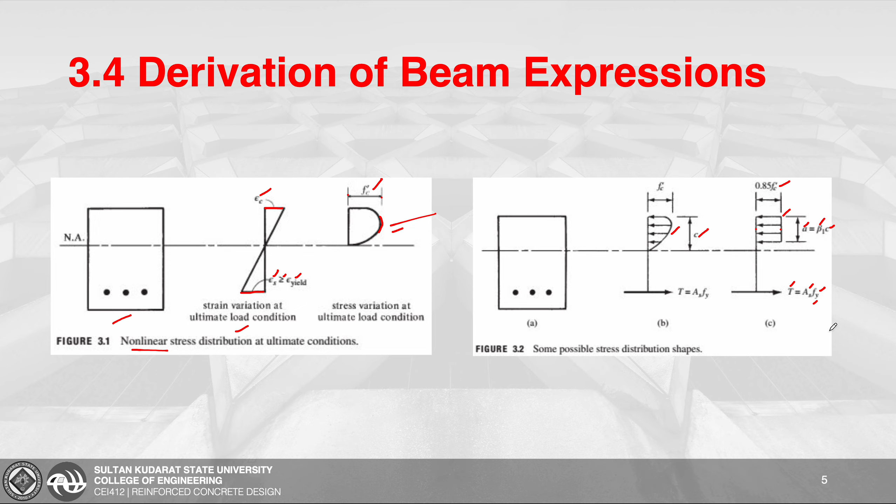And instead of using C, we're going to make use of the depth of the compression block A, which is equivalent to our beta factor times our C. And of course, our tensile force T is equivalent to AS times our Fy. Fy is used here because this is considering that our extreme tension steel yields.

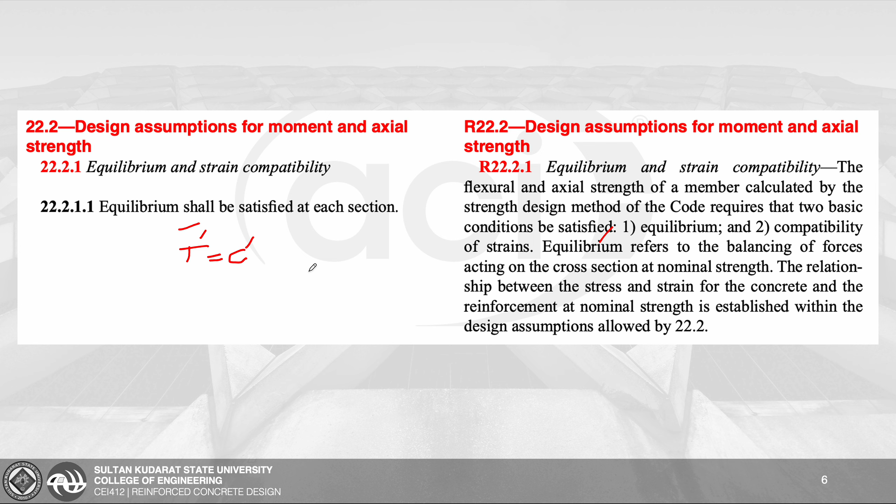These are our design assumptions for moment and axial strength. First, equilibrium shall be satisfied at each section, meaning the balancing of forces acting on the cross-section at nominal strength. That's why we have the relationship that T is equivalent to C, in which T represents the tensile force of our steel reinforcement, which must be equivalent to C, the compressive force from our compression block stress.

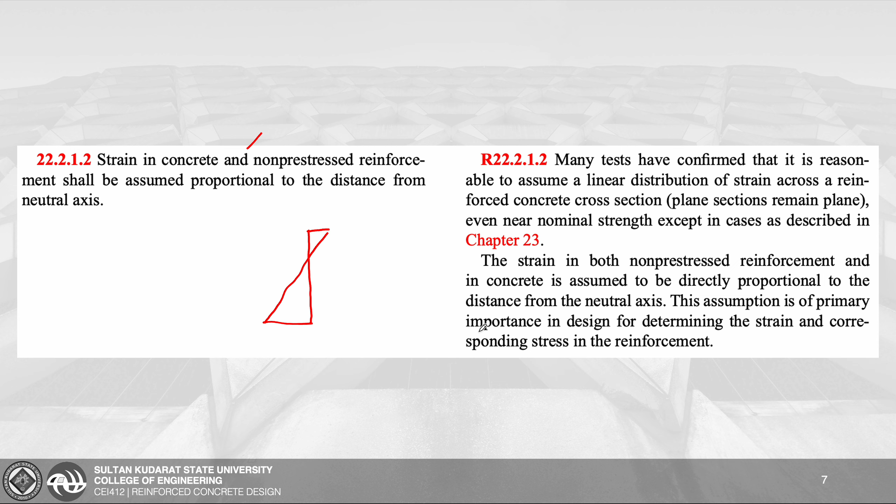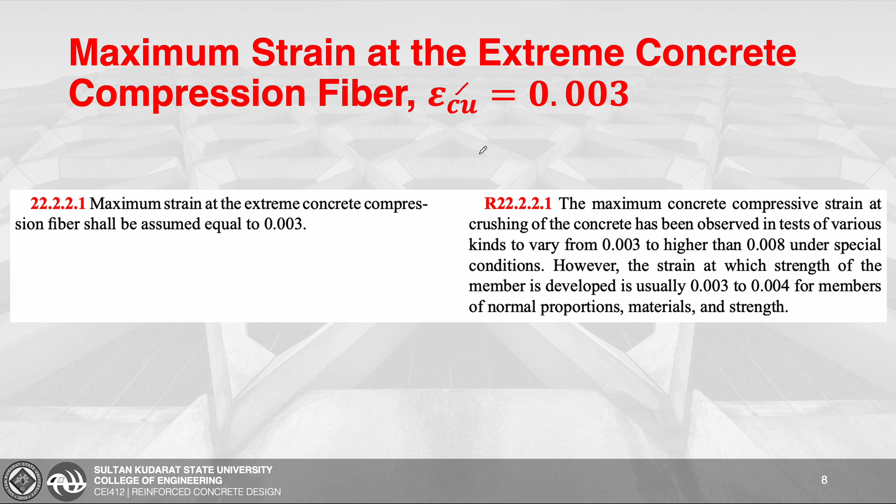Also, the strain in concrete and non-prestressed reinforcement shall be assumed proportional to the distance from the neutral axis. That's the reason why our strain diagram has this shape. And also, we have the maximum strain at the extreme concrete compression fiber, represented by epsilon sub Cu, which is equivalent to 0.003.

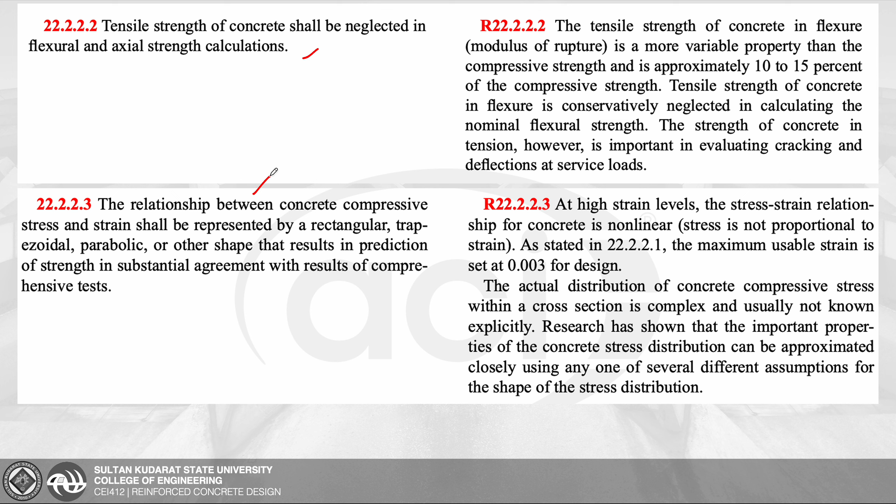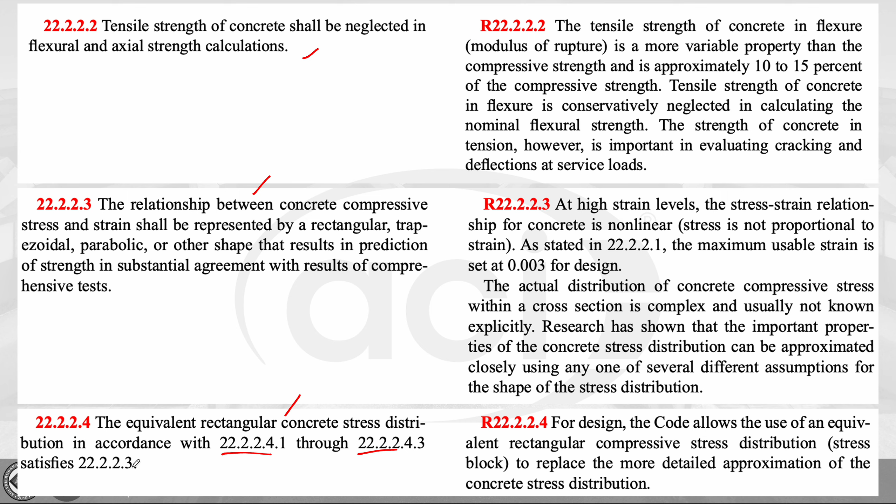The tensile strength of our concrete shall be neglected in the flexural and axial strength calculation. Also, the relationship between the concrete compressive stress and strain shall be represented by a rectangular, trapezoidal, parabolic, or other shape that results in prediction of strength in substantial agreement with results of comprehensive tests. Lastly, the equivalent rectangular concrete stress distribution in accordance to this section satisfies section 22.2.2.3.

We have also the depth of our compression block stress, A. According to the code, the concrete stress of 0.85 FC prime shall be assumed uniformly distributed over the equivalent compression zone, bounded by the edges of the cross-section and a line parallel to the neutral axis located at distance A from the fiber of maximum compressive strain.

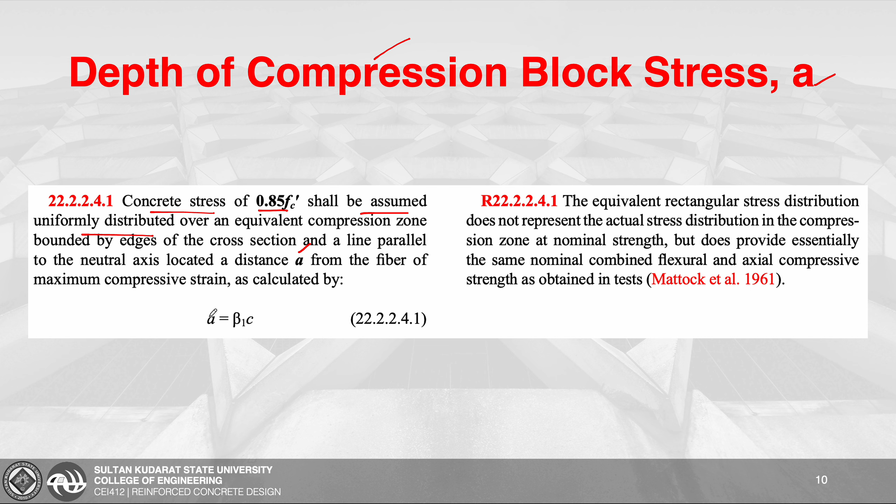So, the depth of our compression block stress A is equivalent to our beta factor times our C, in which C is the distance from the fiber of maximum compressive strain to the neutral axis. And our beta factor is...

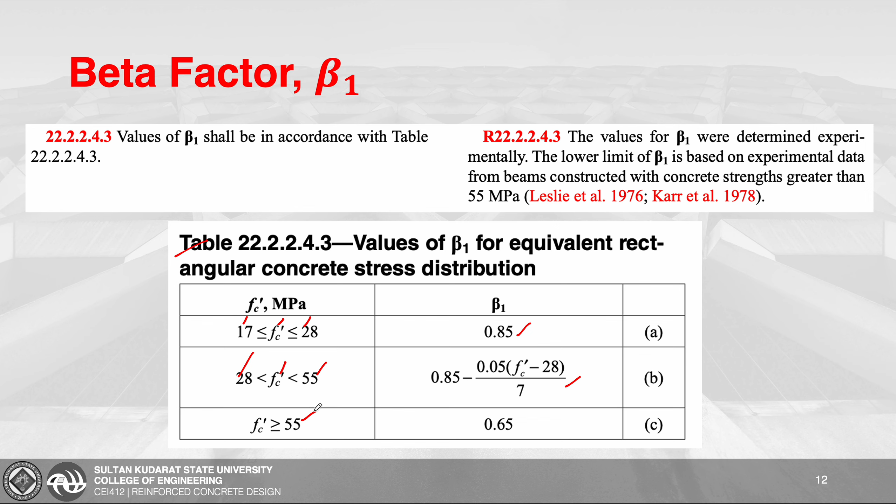But for cases that our FC prime is greater than or equal to 55 megapascal, our beta factor should be 0.65.

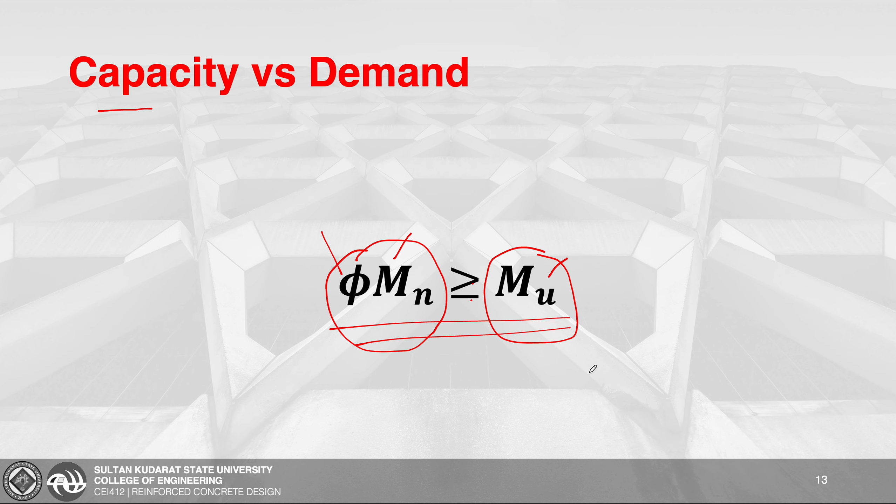Capacity versus demand. Our capacity is represented by multiplying our strength reduction factor by the nominal moment, and this must exceed or be equivalent to our M sub U. M sub U corresponds to our demand or factored moment from using the load combinations, the most critical one. If we satisfy this equation, and therefore, we can say that our designed reinforced concrete is safe for flexure.

Coefficient of resistance is being represented by our notation R sub n.

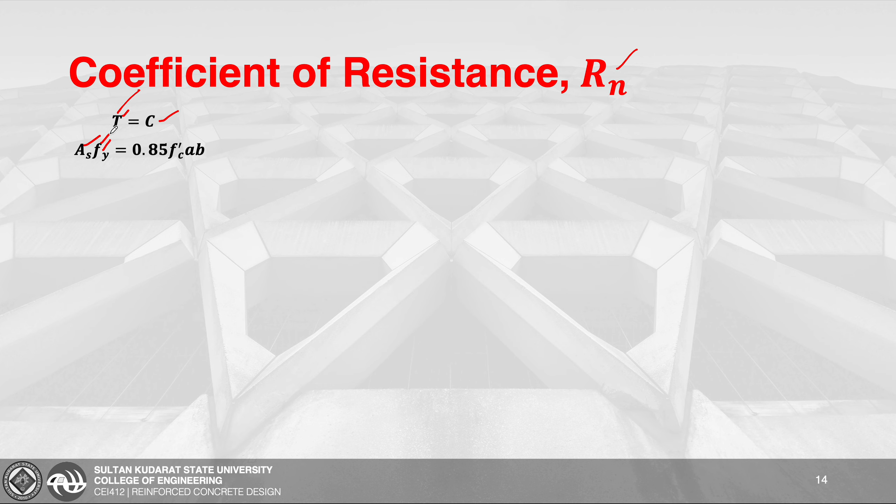From our equilibrium of forces, the tensile force of our steel reinforcement is equivalent to the compressive force of our compression block. Considering that our steel will yield, our T is equivalent to As times Fy, and our C is equivalent to 0.85 Fc prime times the area of our compression block, a times b. This is considering that our section is rectangular.

If we're going to rearrange our equation here, our A, or the depth of our compression block, is just equivalent to As times Fy all over 0.85 Fc prime times b.

Now let us multiply both the numerator and the denominator by D. So the equation now becomes this one. Then, we factor out As all over bD, and what remains inside the parenthesis is FyD all over 0.85 Fc prime.

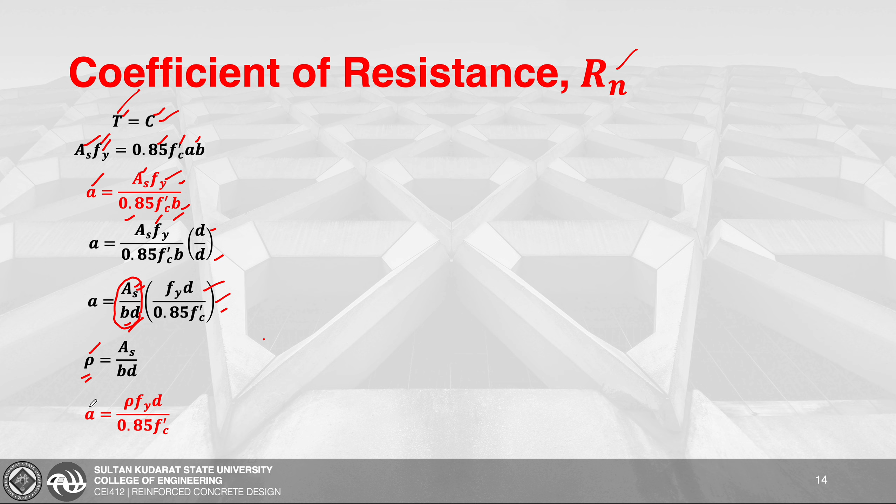If we let a variable represent the ratio between our steel area and the product of b times D, we use the notation rho. So now our A becomes equivalent to rho times FyD all over 0.85 Fc prime.

If we sum up our moments at the centroid of our compression block, our nominal moment is equivalent to T times the moment arm D minus A over 2. And if T is represented by the equation As times Fy, this now becomes the equation of our nominal moment.

And if we multiply both sides of our equation here by the strength reduction factor, we get our capacity.

Also, let us replace our A here with this equation. So this now becomes the equation for our phi Mn.

Then after that, we're going to simplify this term here. So 0.85 times 2 will now be equivalent to 1.7.

Also, our steel area, As, is equivalent to rho times bD. This expression was taken from this equation. So what we do here is substitute As with this equation, and this is what results.

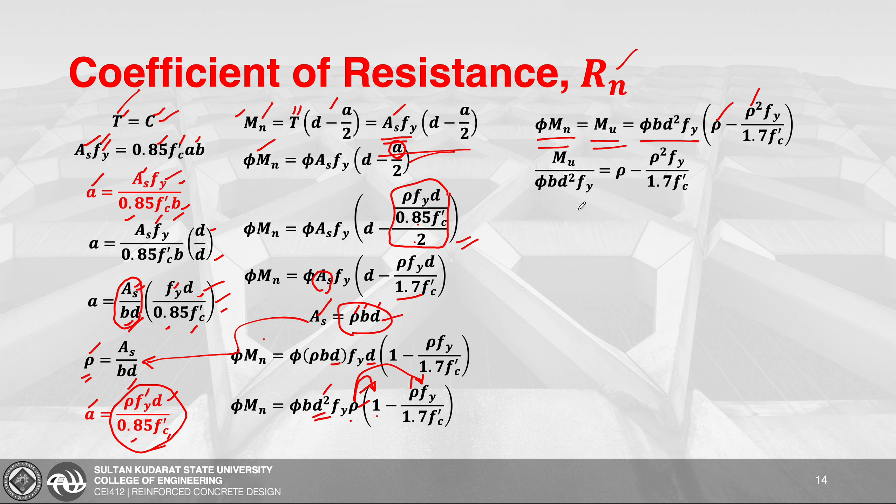And after that, we transpose this term to the other side, so it becomes positive. And then we factor out Fy all over 1.7 Fc prime to get this term here.

Also, our rho here will be transferred to the other side of our equation, so it becomes negative. And then we factor out 1 over Fy from this equation to get this term, and this is now equivalent to 0.

Then after that, from here, we can now derive the equation of our coefficient of resistance, because R sub n will now be equivalent to Mu all over phi bd squared. So this is now the derived equation of our coefficient of resistance.

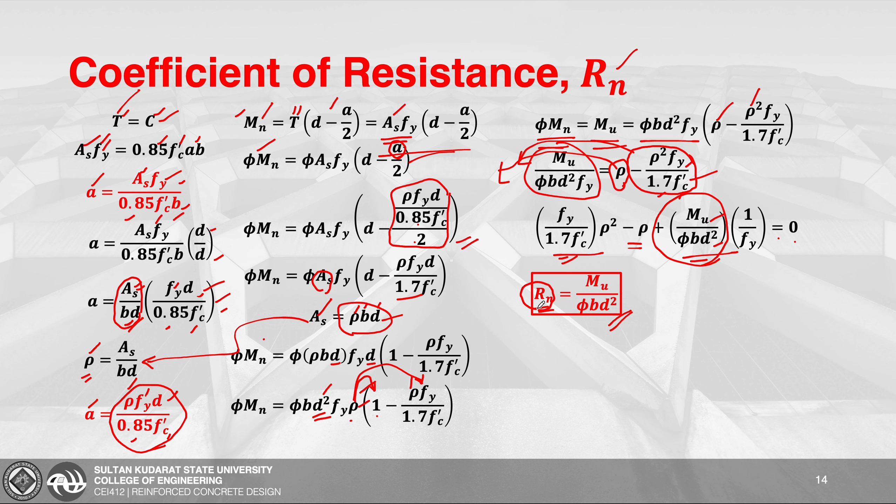After that, we're going to derive the required steel ratio. Continuing our equation, let's go back. The term mu all over phi bd squared will be replaced by a notation, r sub n. So our equation now becomes this.

This is a quadratic equation, so we'll use the quadratic formula. A is equivalent to the coefficient of our rho squared, which is fy all over 1.7 fc prime. B is the coefficient of rho in the second term, which is negative 1. Lastly, C is our constant, equal to Rn times 1 all over Fy.

Using the quadratic formula, x is equivalent to negative b plus or minus the square root of b squared minus 4ac, all over 2a. Here, x represents rho, so we can replace it with rho. Let's substitute b, which is negative 1; a, which is fy all over 1.7 fc prime; and c, which is Rn times 1 all over Fy.

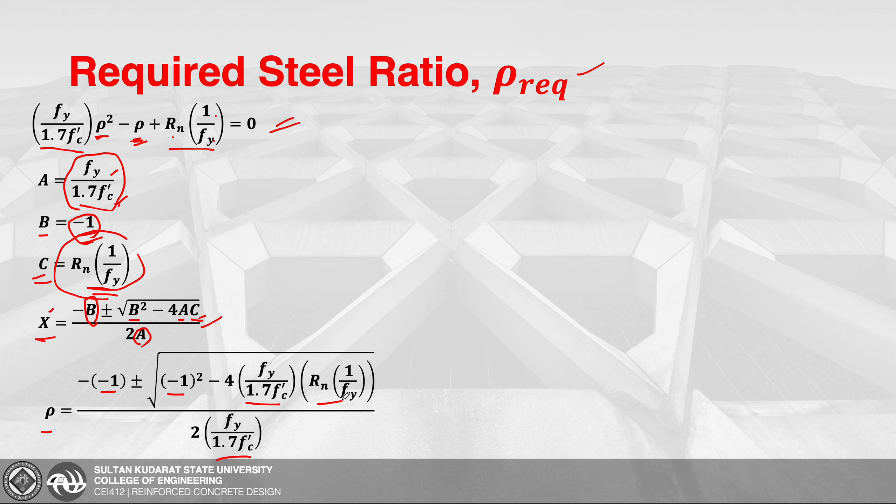After this, let's simplify. Note that 1.7 can be factored into 0.85 times 2. After that, we have 4 here and 2 there, so these cancel out, becoming just 2. That's why we'll have an equation with 2 times Rn. And in the denominator, this 2 also cancels, leaving behind this expression.

After that, we simplify further. What happens is the denominator gets multiplied into the numerator, but we get an inversion. So our rho is now equivalent to 0.85 times fc prime all over fy, times 1 plus or minus the square root of 1 minus 2Rn all over 0.85 fc prime.

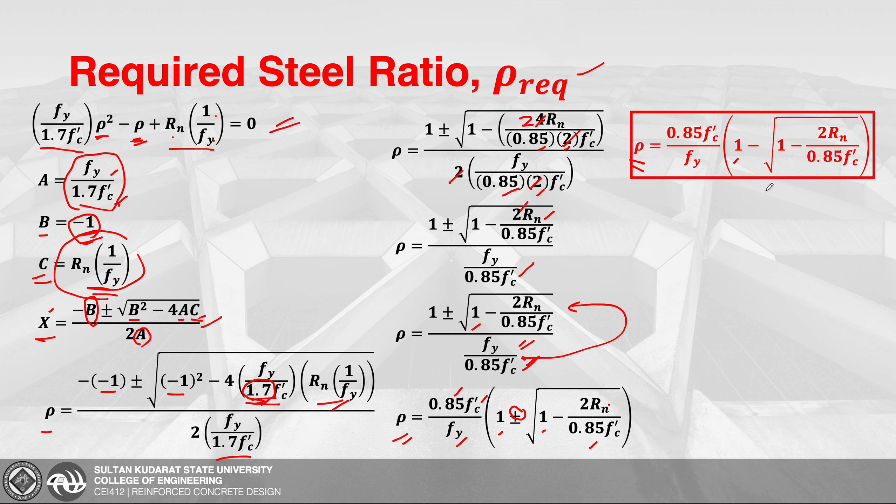If we neglect the positive part of our equation, our required steel ratio will now be equivalent to 0.85 fc prime all over fy, times 1 minus the square root of 1 minus 2Rn all over 0.85 fc prime.

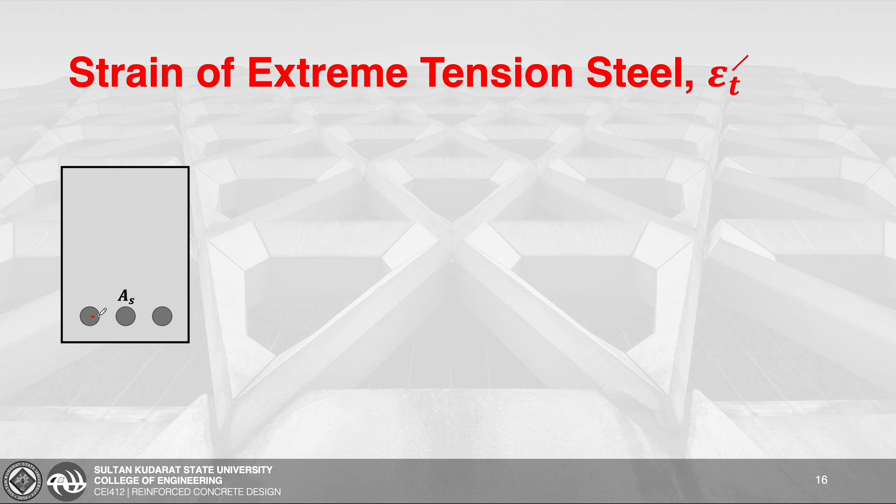Lastly, we have the strain of the extreme tension steel, represented by the symbol epsilon sub t. Let's say we have here our cross-section of a reinforced concrete rectangular beam, where the total area of our steel is represented by A sub S.

Then we have the width of our beam, and also our effective depth. Let's say this red line is the location of our neutral axis. Then we have construction lines as a guide here. We're going to draw our strain.

First, our strain is strain sub Cu, which is the strain at the extreme compression part of our concrete. Then we draw a line from this point crossing the location of the neutral axis going to here. Then we have another strain, strain sub T, or epsilon sub T, which is the strain at our extreme tension steel.

From our extreme compression fiber of the concrete going to our neutral axis, this is our C. Then the remaining dimension here is D minus C. As you can see, we have similar right triangles here.

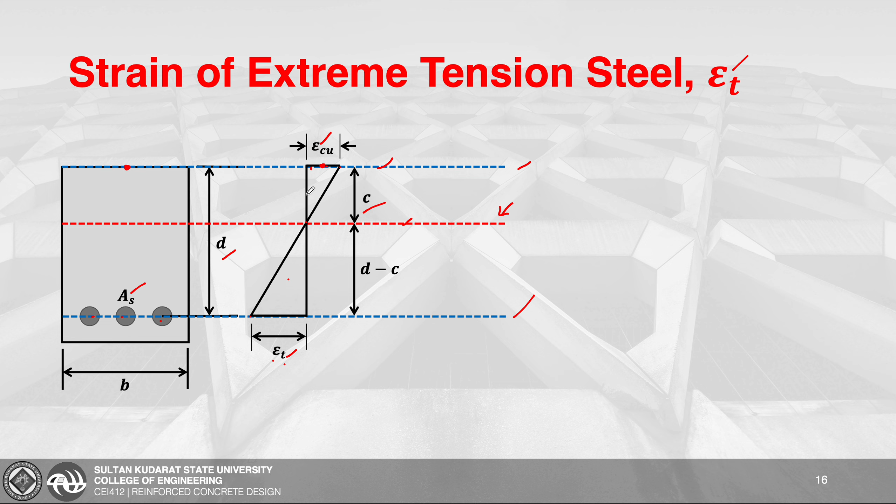Using the proportion, the strain of our extreme tension steel all over D minus C is equivalent to the strain of our concrete all over our C. By cross multiplication, the strain of our extreme tension steel is now equivalent to the strain of the extreme compression fiber of our concrete times D minus C all over C.

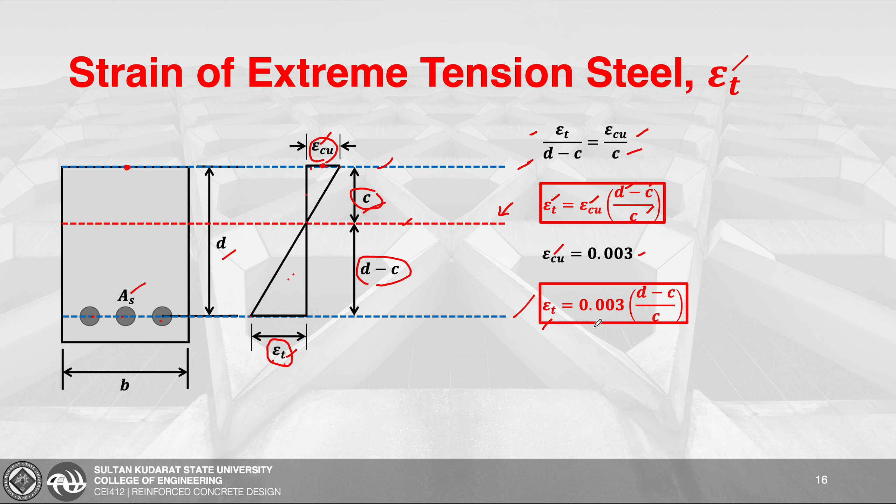However, according to our code, the strain of the extreme compression fiber of our concrete is equivalent to 0.003. Therefore, the strain of our tension steel is now equivalent to 0.003 times D minus C all over C.